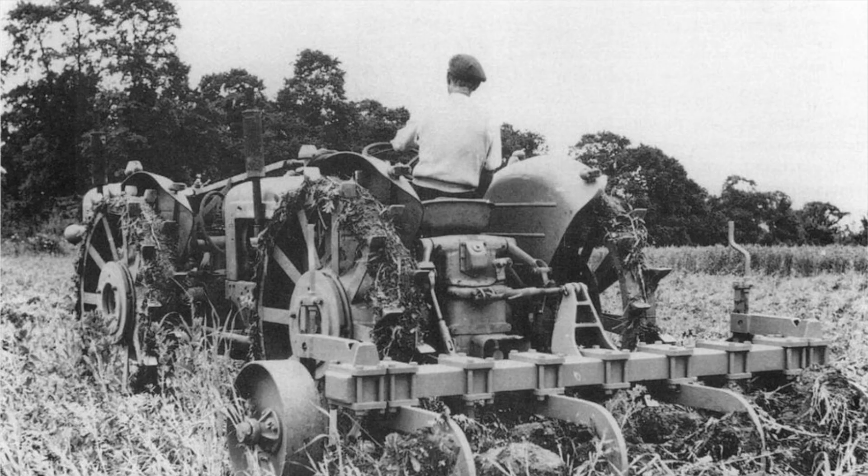In 1957, he started work on the first of his prototypes by joining together two Fordson Major tractors with a beam to create a machine with 100 horsepower. At the time, British tractors scarcely topped 60 horsepower, with popular units like the Fordson Super Major topping out at 54.

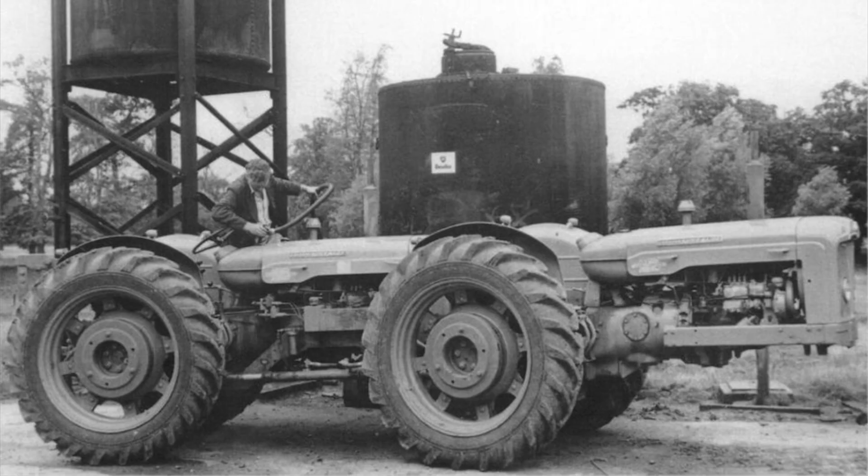A pair of Fordson Majors was chosen by Pryor as they were a simple, tough, reliable design with enough room under the sump for the conversion. They were also in plentiful supply, and so second-hand units were easy to come by at a good price. Pryor then purchased two diesel power units to replace the vaporizing oil units on his tractors and started work on the prototype.

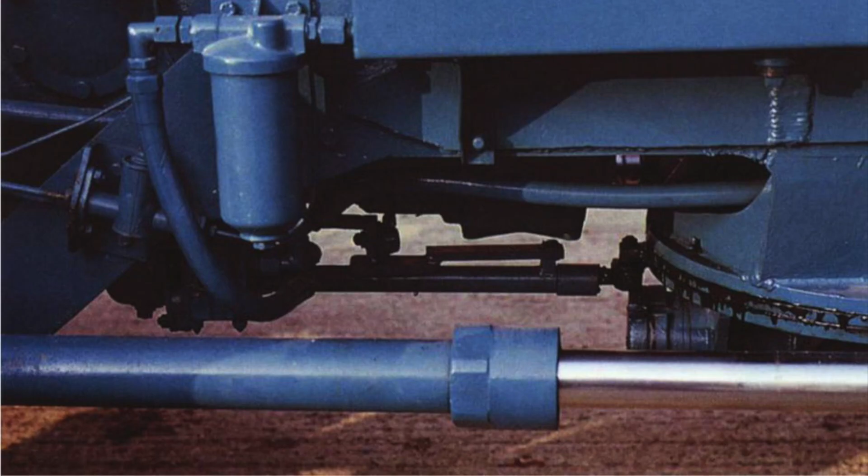Initially, Pryor kept the front wheels, but after realizing a great deal of the unit's power was being wasted on just pushing them along, around 20%, he ditched them in favour of a turntable unit to provide steering duties, eventually deciding on a 2-foot turntable with a centre floating plate carried on heavy-duty steel roller bearings, connected to 4 controlling rams arranged in pairs of 2.

These pairs gave smooth steering action in the middle of the units, with Pryor eventually being satisfied enough by the conversion to file for a British patent in 1958, the same year field trials began. Early field trials proved the unit to be a success, with the two 52 horsepower diesel units providing over 100 brake horsepower, whilst travelling over twice the speed and pulling twice the weight Pryor's old crawler could muster.

Talk about the sight of such a machine quickly spread around the local area, and it is around this time that the unit found the attention of one Ernest Charles Doe. Pryor was already a long-standing customer of Ernest Doe & Sons, and so talks were had about the possibility of placing the unit into production, with Doe securing the manufacturing rights for himself.

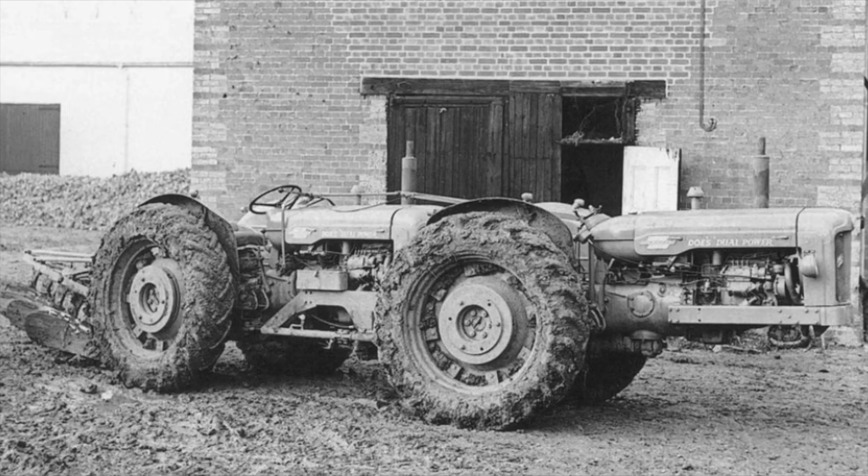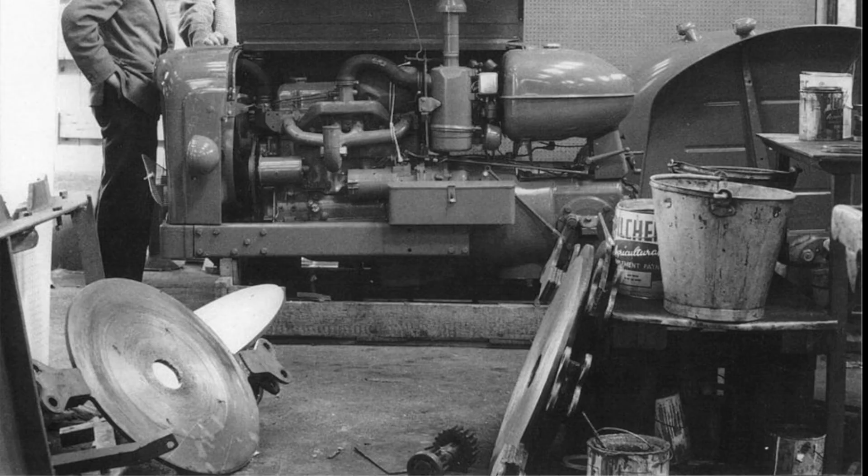Eventually, an agreement was made for George Pryor to build a second frame, this time being mated at Doe's site in Ulting with a pair of Fordson Power Major skid units. It was at Ulting that the unit came under Doe's works manager Charles Bennett, who initiated a number of changes before the final production model. Chief among these changes was the steering rams, now being specially made by the Rayne Foundry in Braintree. Less than 3 weeks later, Doe's demonstration tractor was ready to be shown to the public.

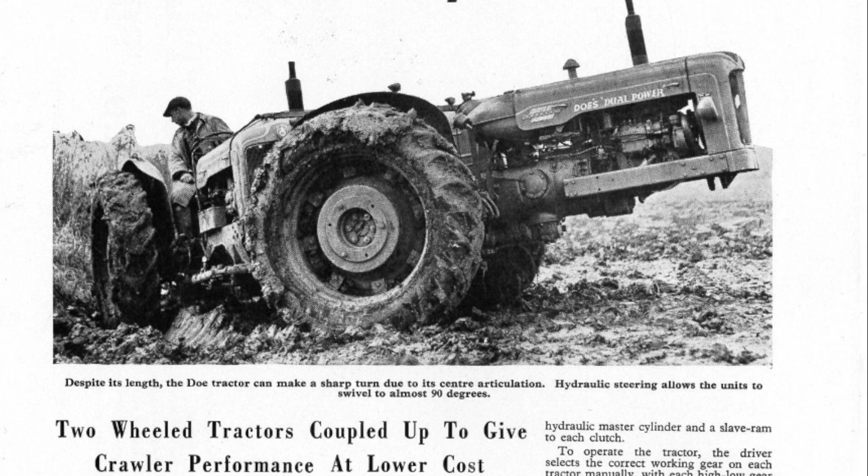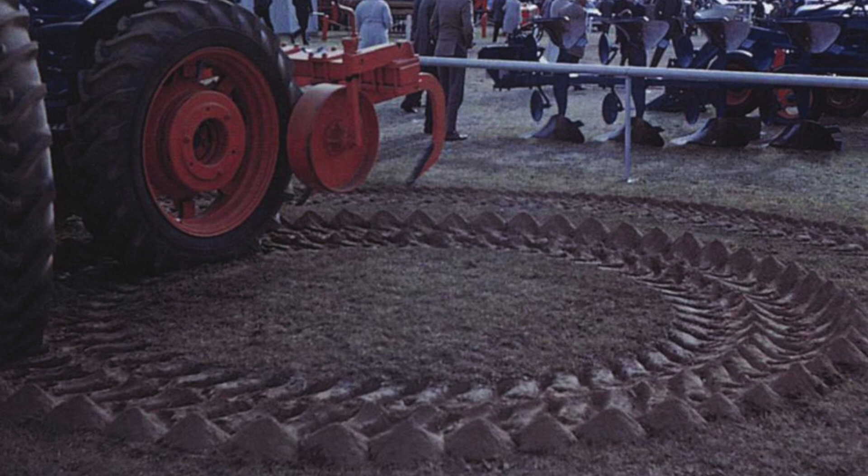The Doe machine, now dubbed Doe's Dual Power, found itself at over 20 feet long. Whilst appearing ungainly, the machine was surprisingly agile with a turning circle of 21 feet, 5 feet less than the standard Major unit. This was thanks to the turntable, which allowed the units to turn at almost 90 degrees of each other. The Dual Power was also blessed with near-perfect weight distribution. However, not all parts of the tractor were as perfect as both Pryor and Doe would have liked.

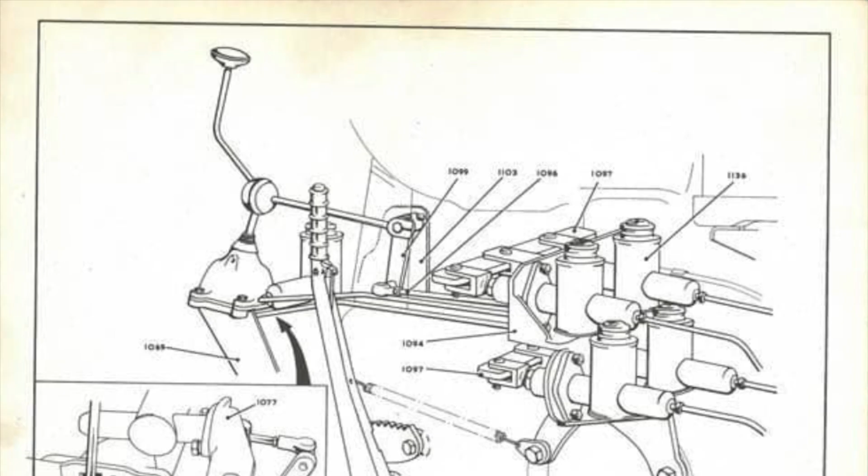Gear selection of the front unit found itself to be a chore, as the driver physically had to go and select the desired gear on the front unit, whilst the high-low lever remained in neutral, before returning and selecting the same gear ratio on the rear unit. The driver then re-engaged the front unit again via a lever that ran across the bonnet to the high-low lever, before engaging the rear's high-low lever and moving forwards.

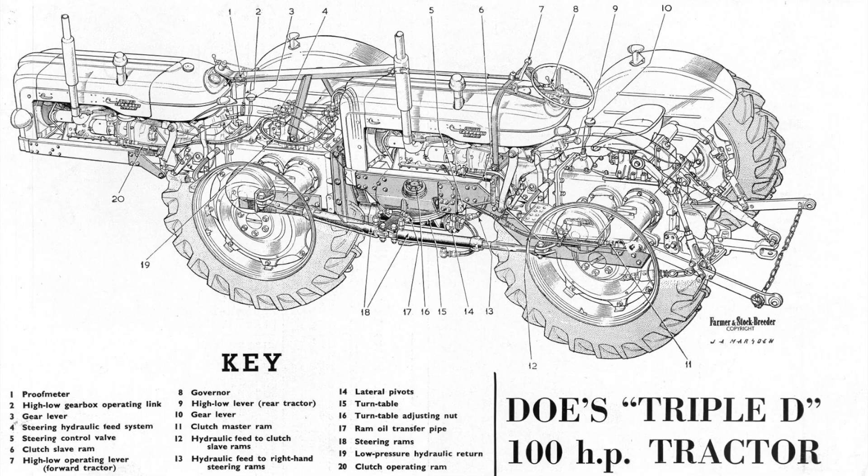For reverse manoeuvres, it was found to be easier to simply use the reverse gear of the rear unit, with the front remaining in neutral. Luckily, clutch operation of both units was synchronised through the single clutch pedal on the rear.

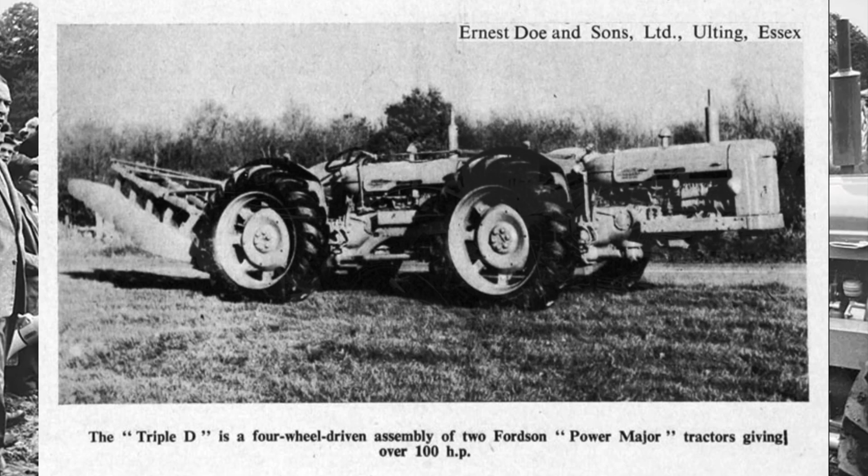Eventually, it was found that optimum running was achieved by setting the front unit to a slightly higher speed than the rear, with the front essentially pulling the rear unit along. The first demonstration was held in 1958 at Boyton Hall, and proved the Doe's wet weather capabilities.

With engineering and production duties now handed over to Doe, George Pryor continued to receive royalties for each unit sold, which reportedly just about covered the costs of his original patents. Doe's first sale came in October 1958 to a farmer in Suffolk, with another unit being supplied to Suffolk that November, before closing the year with a unit in Essex.

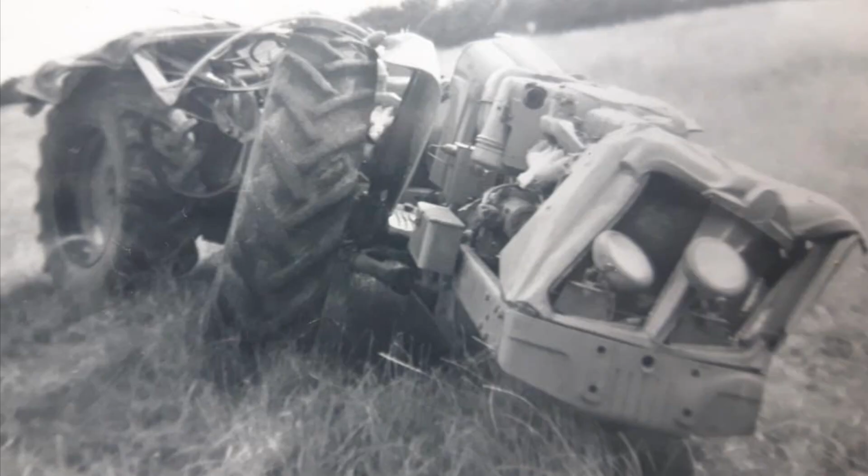2 more sales to Essex farmers in February 1959 were made before Doe decided to make some modifications to the design, and so took the machine off the market. Firstly, the steering received a design change due to high sensitivity that had resulted in at least one damaged machine, and dramatic steering throughout the 6 currently produced.

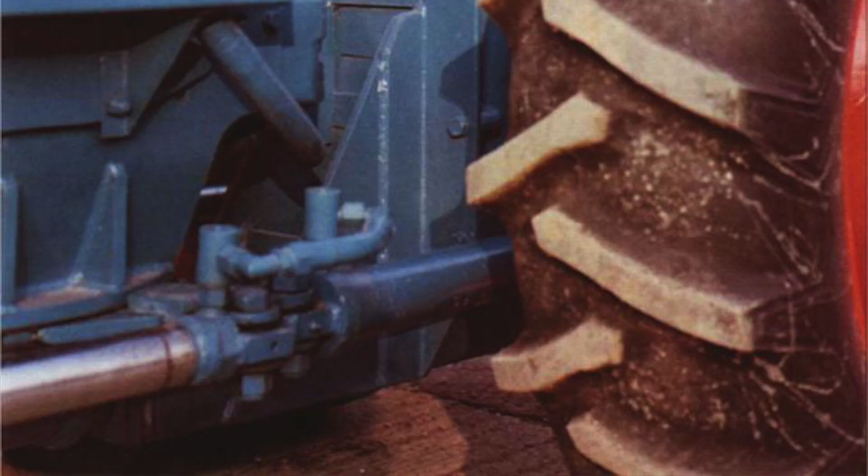A change to a Vickers pump took the steering range from a few inches to 1.5 turns lock to lock, allowing for much greater control. Finally, the name Doe Dual Power was dropped in favour of Doe's Dual Drive, more commonly known as the Triple D. The Triple D made its return debut at the June 1959 Essex show, sporting its new steering system, new name, and a new colour scheme featuring orange bonnets.

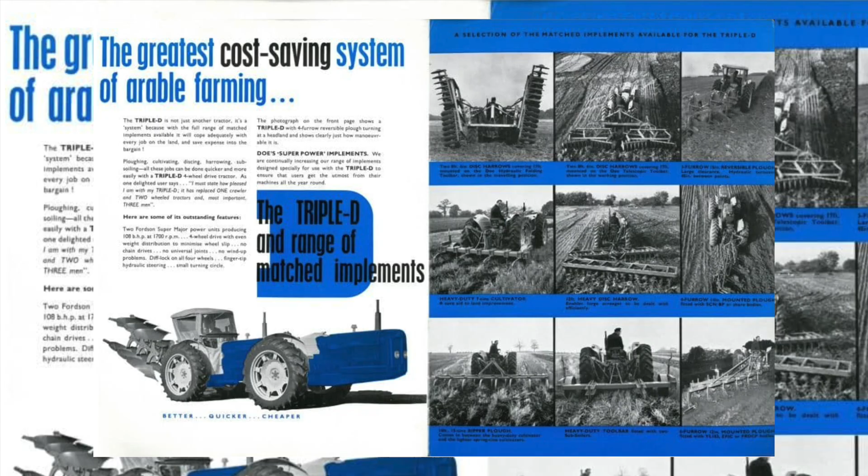Doe had brochures scattered across the farming press, with the first sale being made on August 1, 1959, with another 2 being sold to Russia and 1 to Sweden. In total, 11 units left the works in 1959, with much interest in the machine, but few farmers seeing it as more than a novel concept. Many just didn't have farms big enough to require such a machine.

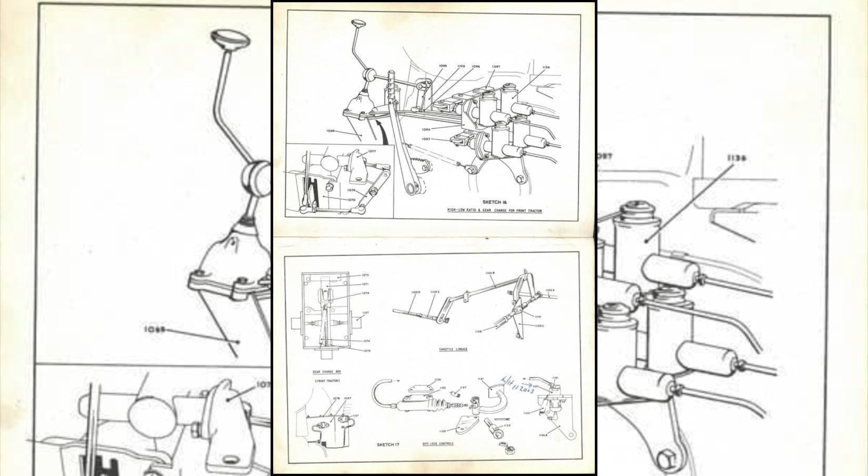3 more units were sold by March 1960 before Doe finally wrapped production up of the early models, with only 20 having been manufactured to date. By this point, the health and safety officials had become concerned regarding the method of changing gear on the front unit, with the original link rod method being changed to a master cylinder and slave unit.

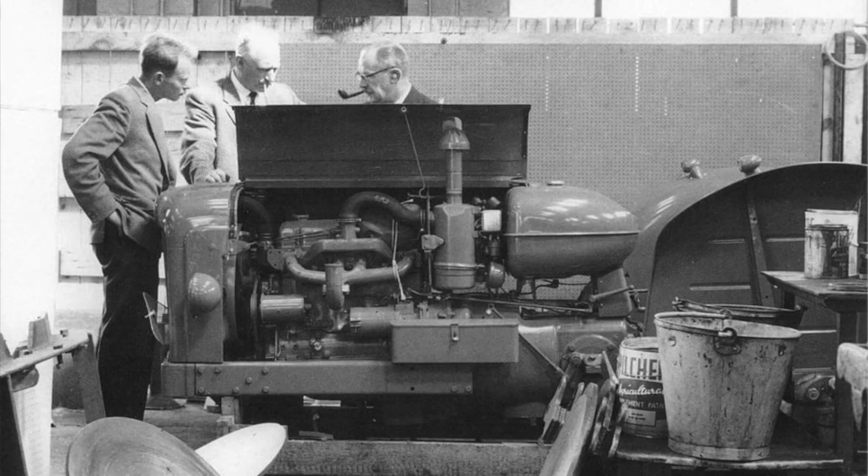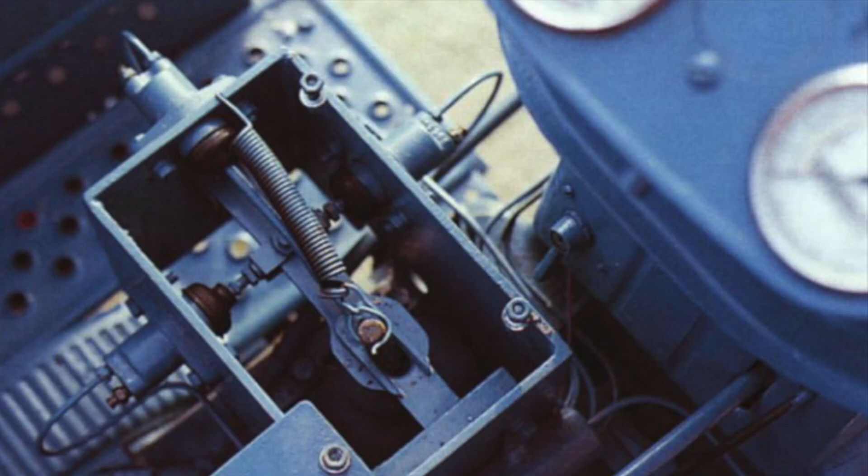Whilst Doe's engineers were at work to replace the high-low mechanism, they tasked themselves with inventing a method for changing gear on the front unit from the rear. Devised by Charles Bennett, the eventual method consisted of a lever and pedal arrangement fitted to the rear unit, allowing for selection of the first and second gears via the lever and the third and fourth via the pedal.

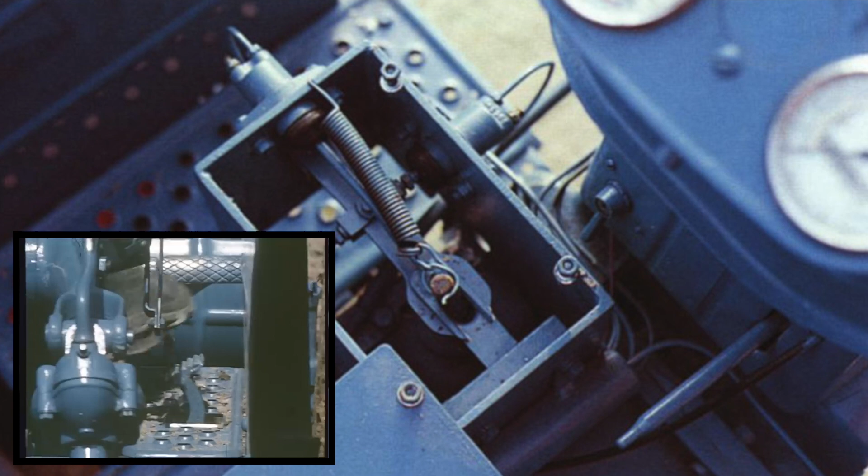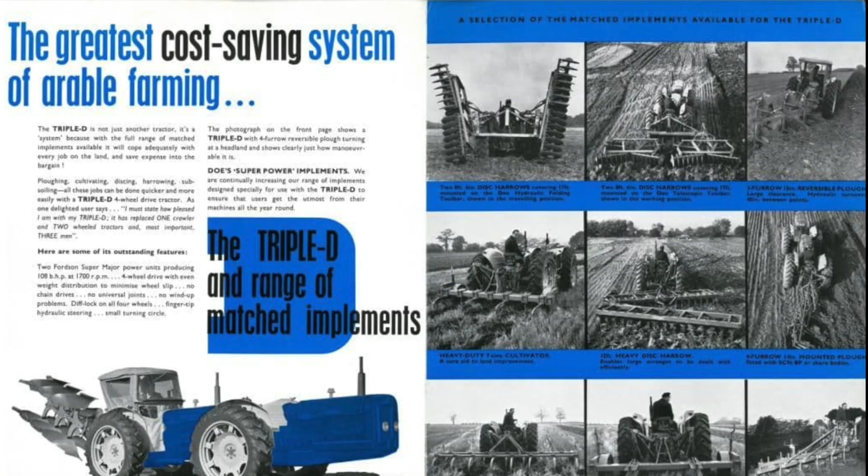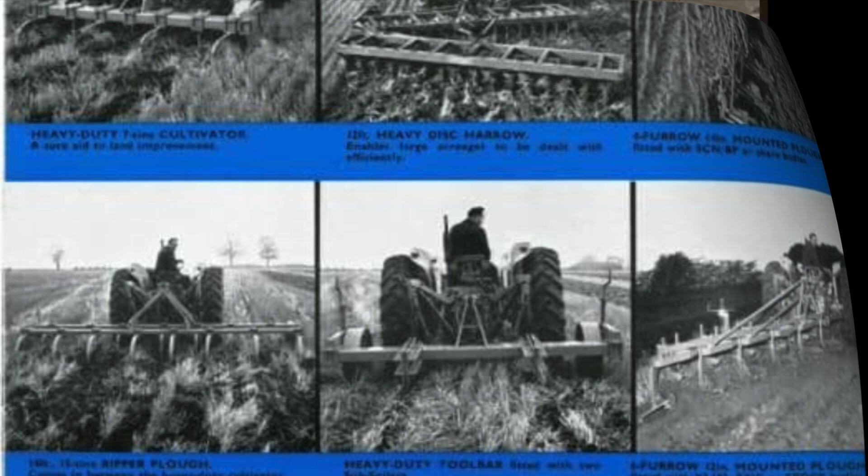With the issue of gear selection resolved, the Triple D was relaunched in May 1960 at a base price of £1,950, roughly £37,000 today. Initially, the new hydraulic change was offered as an option for £75 extra, but eventually was made standard on all Triple Ds sold. Another option available at the relaunch was a remote starter for starting the front unit from the driving position on the rear, charged at £25.

Standard Triple Ds came with 11x36 tyres, but buyers had the option to change to 12x38s for greater speed, clearance and traction. Cage wheels were also available for £84 a pair from Kemper in Germany and allowed for tight turning. Finally, the option of steel wheels were available for improved traction, but were found to cause expensive failures over extended use.

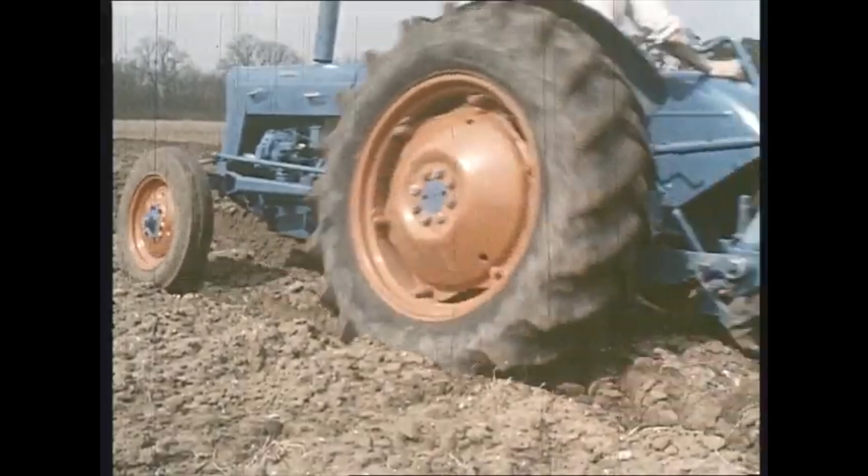Rather interestingly, the original design of the Triple D allowed for conversion of the machine back to 2 separate tractors for dry summer months when the advantage held by the machine was not so great. However, only one conversion kit for this purpose was actually ever sold.

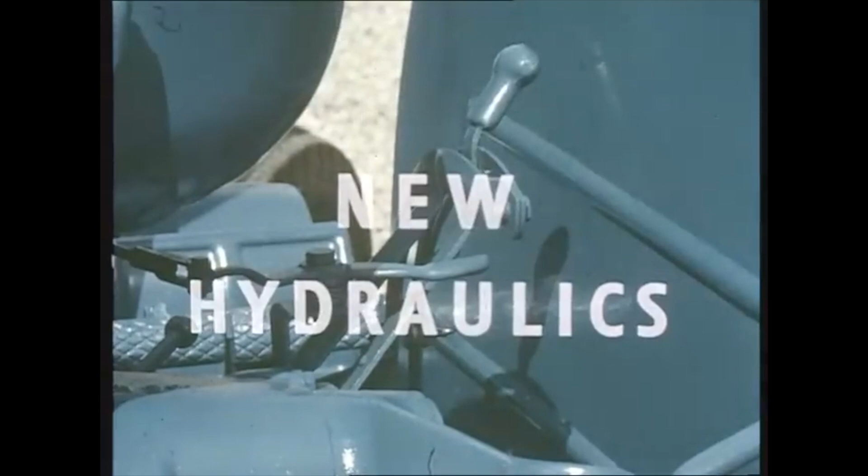The new and improved Triple D found itself earning second place at the Royal Show that year, and from the end of 1960 the skid units were changed to Fordson's new Supermajor. These new Supermajors brought with them the introduction of a number of hydraulic improvements, alongside locking diffs and disc brakes.

Up until now, Doe had been using 2 complete Majors to produce the machine, managing to sell off the parts no longer required after the conversion. But with the introduction of the new Supermajor, Doe started purchasing units directly from Ford minus their front wheels, axles and hydraulics, and sporting an uprated radiator.

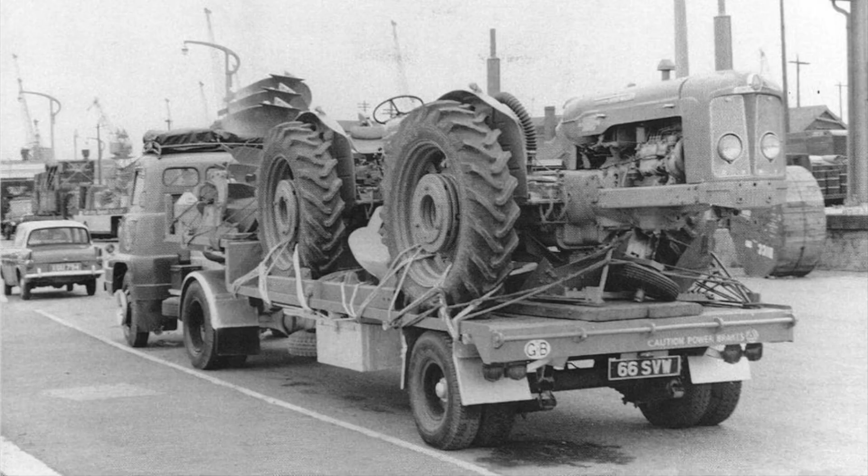With all its upgrades, the new model found itself being demonstrated across the world, with eventually 28 Triple Ds being exported as far as Israel, South Africa, Russia, Denmark, Sweden, Austria, Germany and Spain. One Irish farmer supposedly refused to pay for the cost of delivery by lorry to Fishguard Harbour in Wales for shipping, instead taking on the 300-mile journey from Essex himself.

However, it wasn't long until the Triple D was demonstrating itself across the UK once again, before catching the attention of a South Dakota farmer, Ralph Christensen, at Smithfield's show. This meeting resulted in the first of 4 Triple Ds to cross the Atlantic in 1961, number 210, with Ralph being so impressed that he eventually set up a US distribution company trading under Tandem Tractors Incorporated. This led to a further 3 units eventually finding their way to the United States in February 1962, with one believed to still exist.

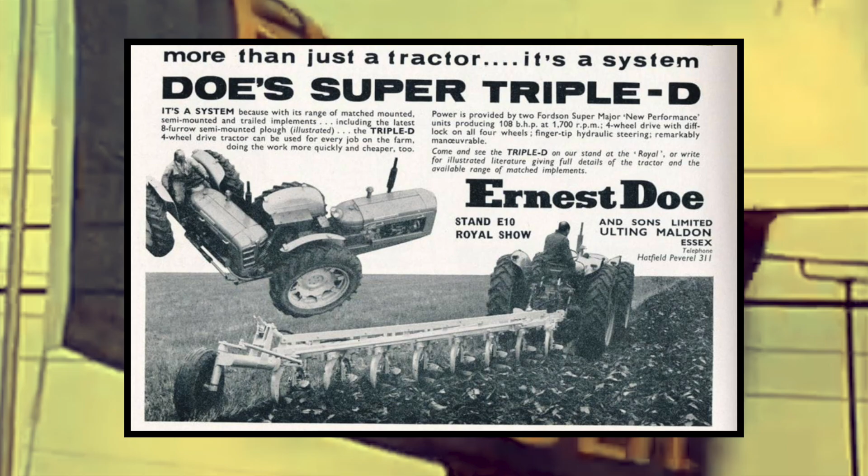Back home, and despite its price having risen to £2,350, the Triple D was steadily proving itself to be a highly capable machine, boasting great speed and manoeuvrability, alongside pulling power that not only shone in the field, but also found one unit being drafted into road haulage duties for construction of the M1 motorway extension.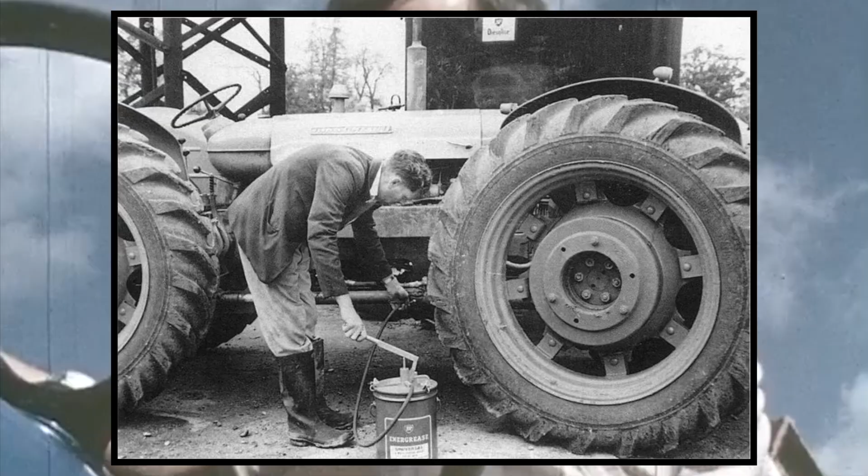Maintenance of the Triple D was also usually best left to the service engineers, as whilst the Triple D was supplied with tools for the necessary adjustments, many found a lack of clearance to perform the tasks outside of a workshop, and most big tasks were a 2-man operation. It was also quickly found that mechanical costs would double that of a usual tractor, because any mechanical parts were essentially duplicated. However, any major mechanical breakdowns often found themselves rooted with the Fords and skid units themselves, rather than any conversion work that had been completed by Doe.

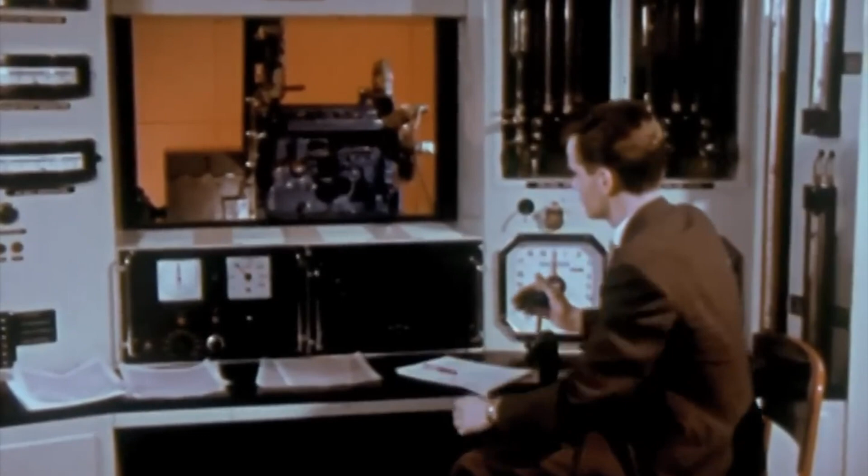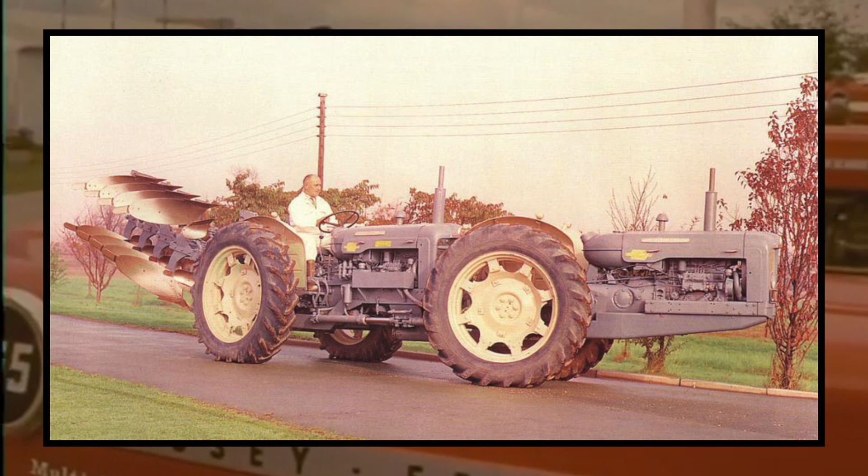A report by the National Institute of Agricultural Engineering found reason to doubt the Doe's suitability for work in hilly areas, but little effect was had on sales, with a large majority of units remaining in the flatlands of eastern England, primarily Essex. The final version of the Triple D was launched at 1963's Royal Show, this time sporting a bluey grey colour and the new Performance Supermajor skid unit, putting out 54 horsepower each for a total of 108. A new basic list price of £2,450 was now teamed with a list of options, including an optional heavy-duty linkage assembly for £100 and a pair of cabs for all-weather working.

The few months following the Royal Show proved the most demand for the Triple D, with 60 units leaving Ulting between July and December 1963. High sales were driven by a wet autumn, and now Doe was considering a new 18,000 square foot factory dedicated to Triple D production. However, this factory would never see the light of day, thanks to the following year's events. In May 1964, Doe found themselves far behind the Iron Curtain after being invited to the British Agricultural Exhibition in Moscow, with their stand being visited by Nikita Khrushchev himself, and eventually securing another Russian machine sale.

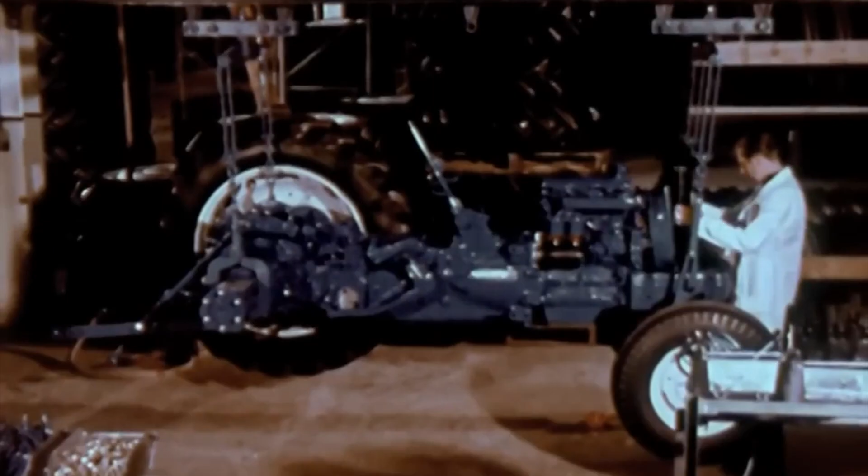However, Ford, who had been directly providing the skid units to Doe for some time, shocked the company when they announced that they would no longer be producing Fordson tractors at Dagenham, with production switching to the new Ford 5000 at Basildon. With the loss of their power units, Doe found themselves dispatching their last Triple D to a dealer in Lincolnshire on October 3, 1964, finally bringing an end to Triple D production after an accepted 289 machines. Unfortunately, the exact production and distribution records were partly lost over time and remain as yet incomplete.

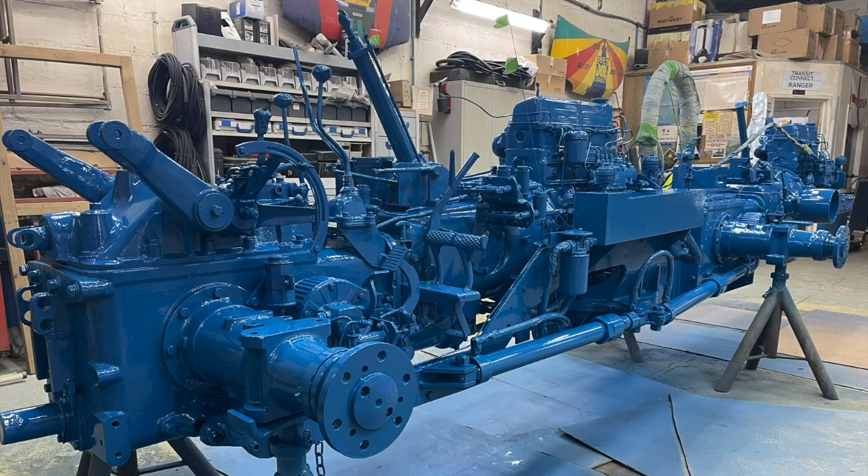What is not lost, though, is the love by many for the Triple D, which, due to its rarity and obscurity, is known to fetch high prices when one comes up for auction, and often finds itself the star of any show it attends. One machine is still owned by Ernest Doe & Sons, who now offer a restoration service for original machines and display their own machine at various shows around the country. However, the change to the new Ford 5000 was not the end for Doe's Tandem machines.